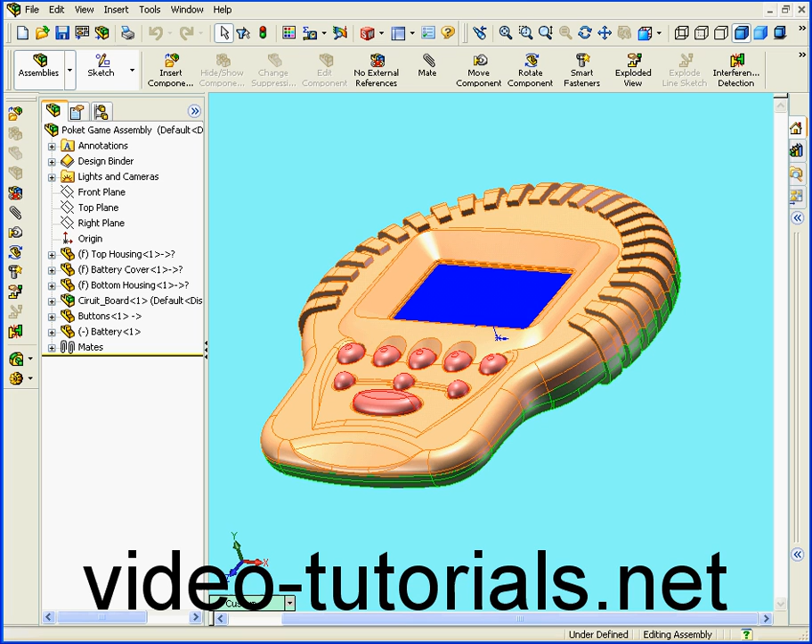Welcome to the final segment of our Pocket Game project. In this tutorial, we'll be finishing the LCD opening.

Let's right-click on the top housing and select Edit Part. Let's expand the specification tree.

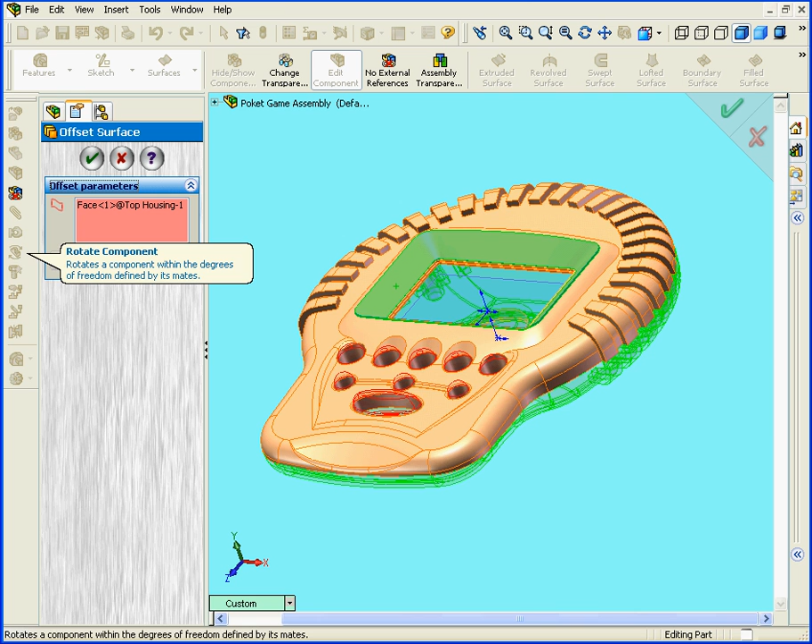Next, I'm going to offset this surface, by 0.5 millimeters. Tab. Let's reverse the direction also. Click OK.

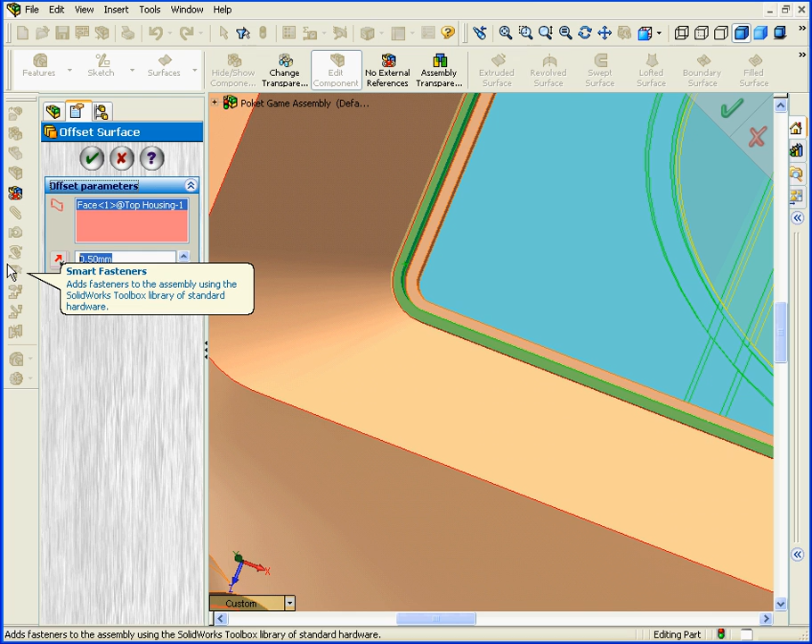Let's offset another surface now. Activate the Offset tool. There's something pre-selected here, let's delete it. Let's select the surface we want and enter a 0 offset distance value. Tab. And click OK.

Alright, let's hide our solid body. Expand the solid bodies folder, right-click and hide.

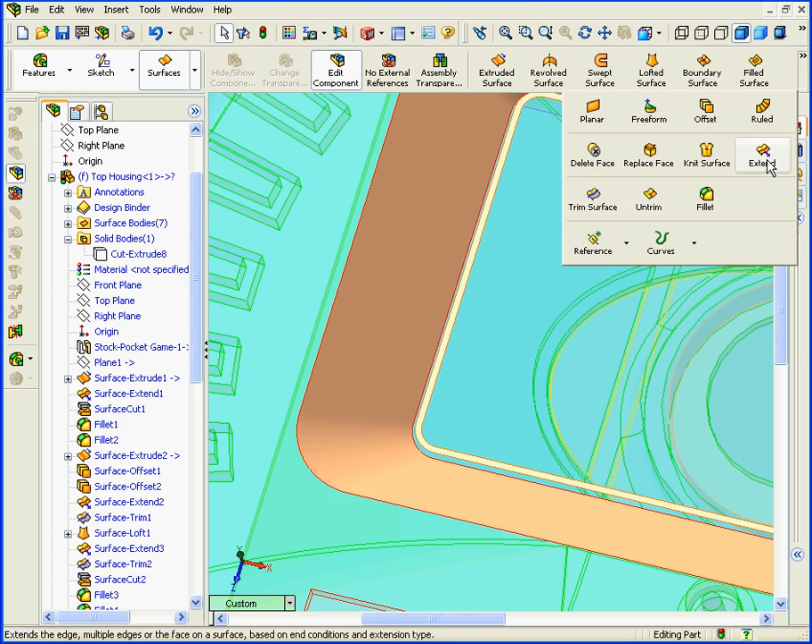Next, we'll need to extend this surface. Activate the Extend tool. Click on this edge. Under End Condition, choose Up to Surface. Now we select the surface to which we'll extend and click OK. Next, let's activate the Planar tool and create a planar surface right here.

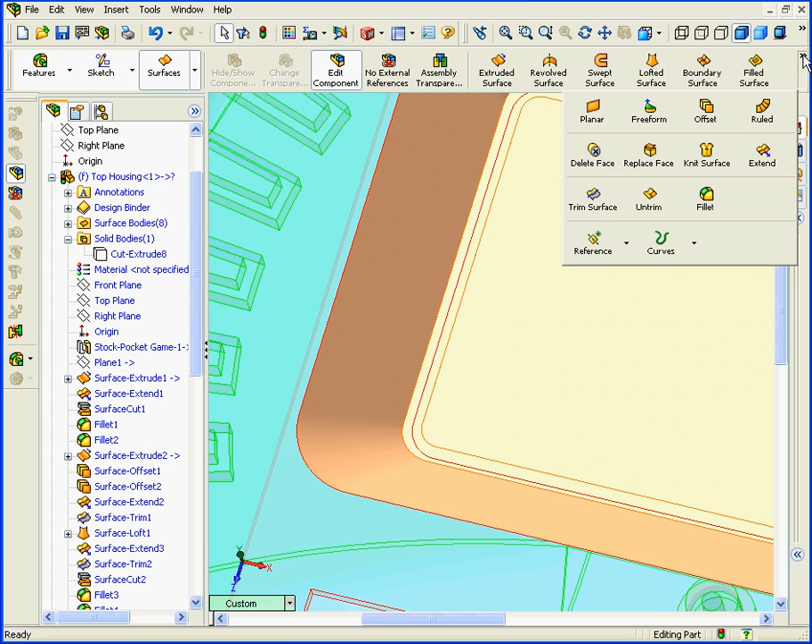Click OK. Now we'll activate the Knit Surface tool and we'll knit these two surfaces together.

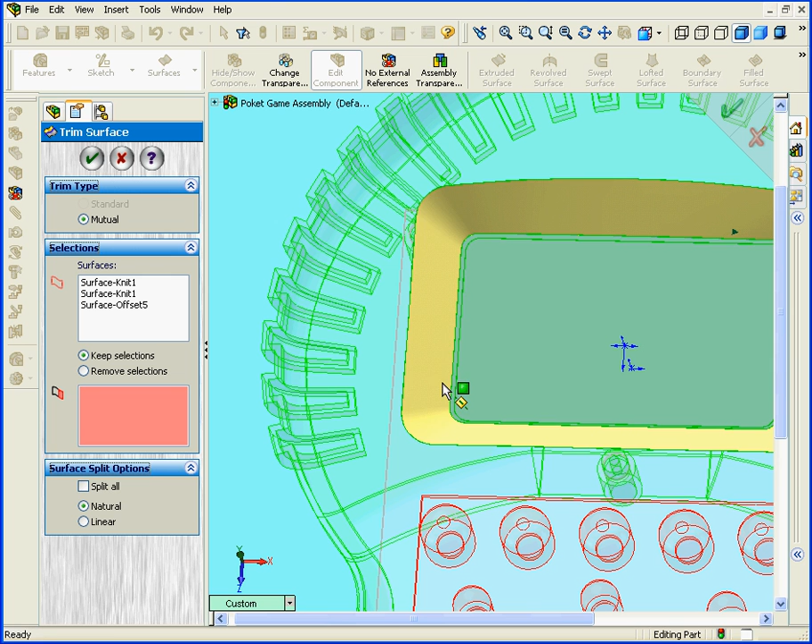Finally, I'm going to activate the Trim Surface tool. Let's select the Mutual Trim type. Let's select these surfaces. In the Keep Selection area, let's keep this surface and click OK.

OK, let's zoom out. Next, let's insert a plane that's parallel to the top plane. Select Top. We're going to offset the plane by 12 millimeters. Let's check to make sure it goes in the right direction and click OK.

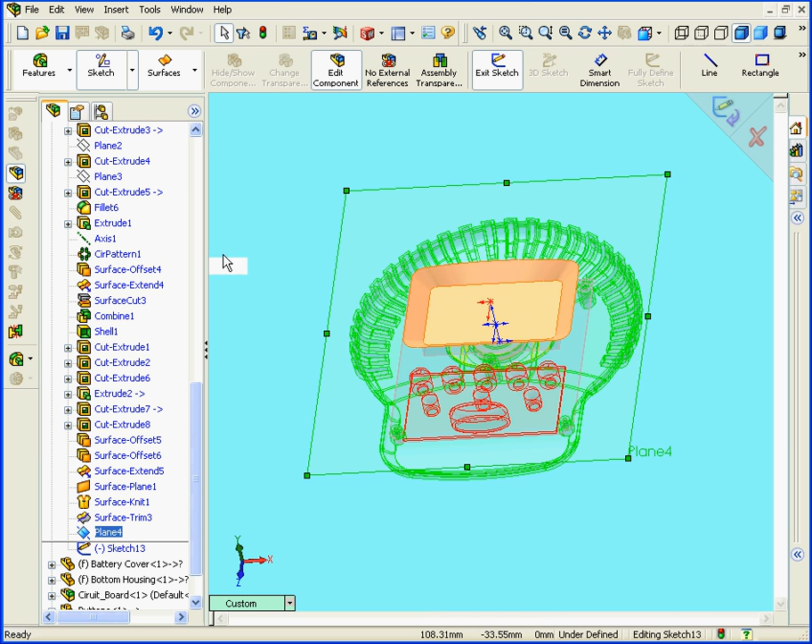Now let's right-click on our new plane and insert a sketch. We'll take a top view.

Next, let's activate the Rectangle tool. Right-click and select.

Activate the Point tool. We'll insert points here, here, here.

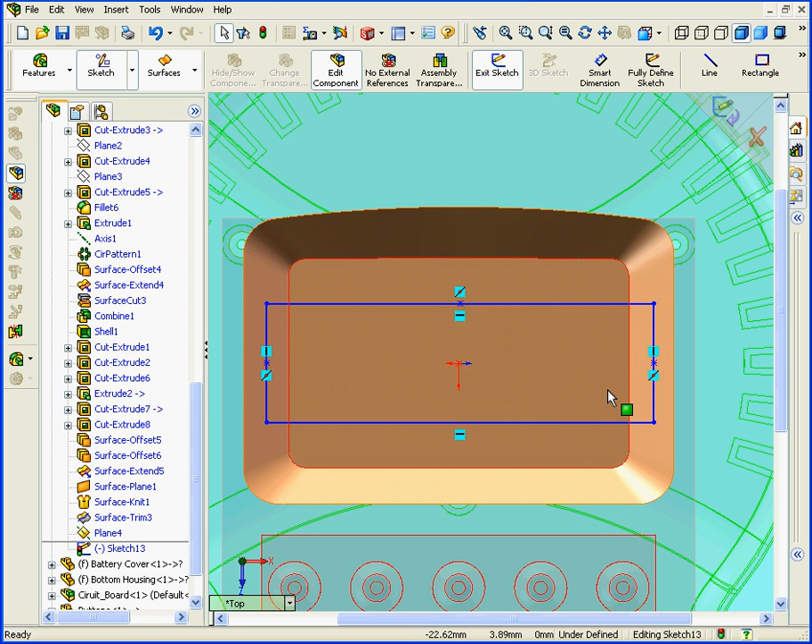Now Shift-select this point, and add a vertical relationship. Shift-select this point, and add a horizontal relationship. Oops, I pressed vertical by mistake.

We'll need to delete that, and let's add a horizontal relationship. And click OK.

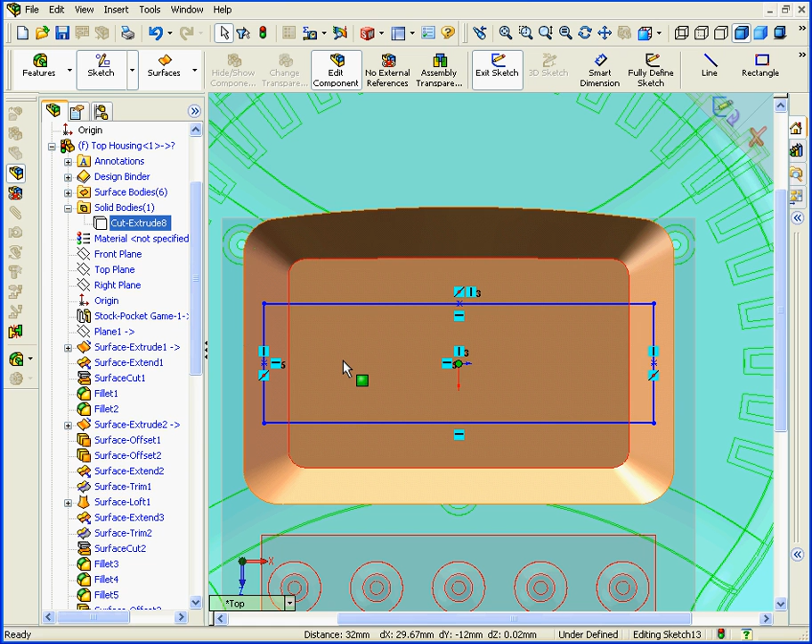Now we'll activate the Line tool to connect these 2 points. Right-click, select.

Let's Smart Dimension. 60 millimeters here. OK.

Here, let's enter a value of 16 millimeters. OK. And OK.

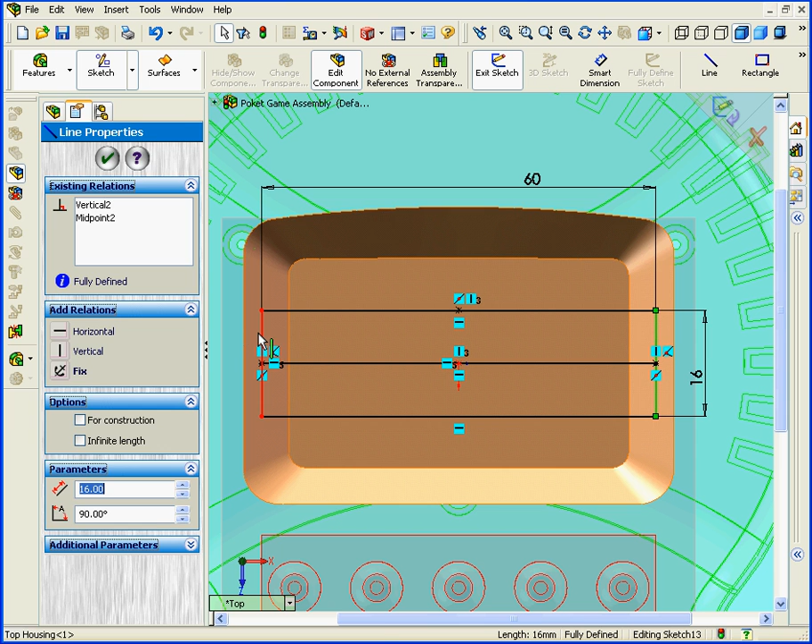Now let's Shift-select these 2 lines and convert them to construction geometry. Next, I'll Shift-select these 3 lines and activate Offset Entities.

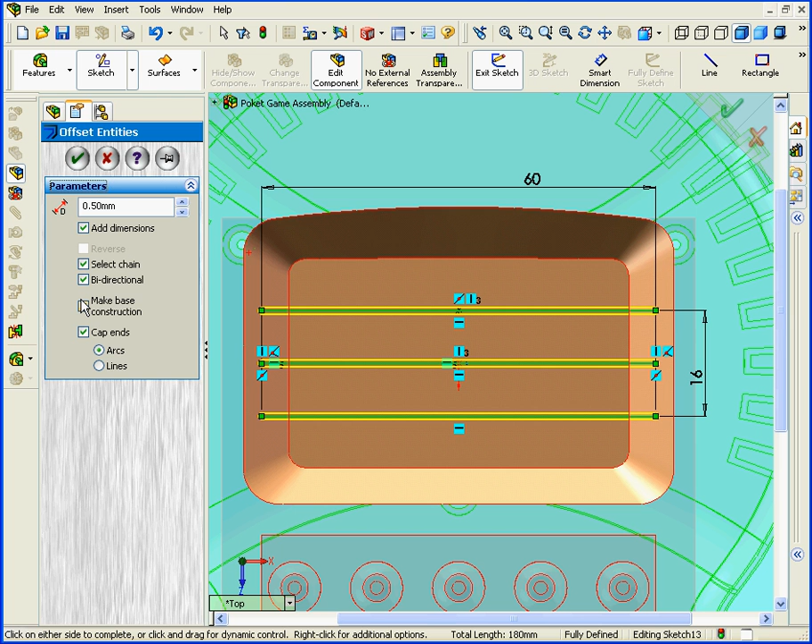Now let's bring back our solid bodies. Right-click and Show.

Next, we'll make an extruded cut. Let's activate the Extruded Cut tool. From the End Condition drop-down menu, let's choose Up to Surface.

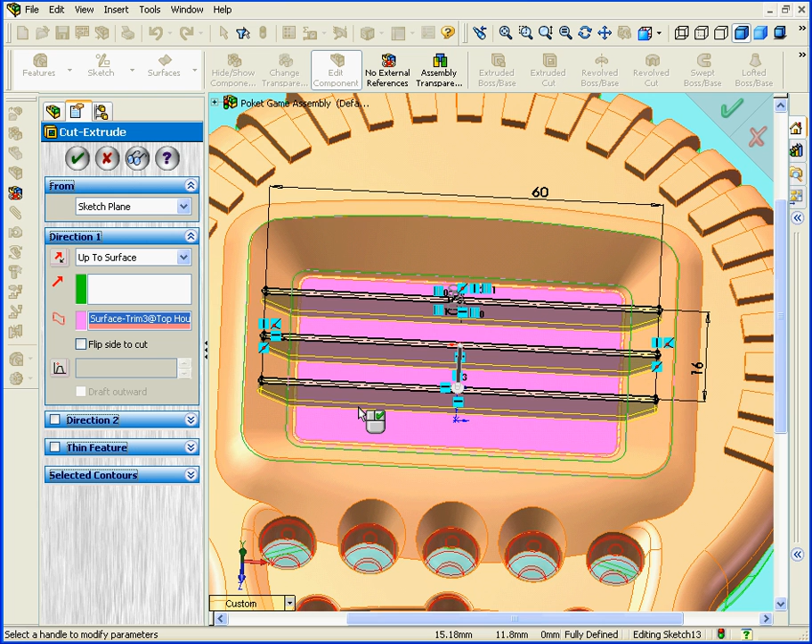And in our surface selection area, we'll select this surface. Click OK. Let's hide this surface. Right-click and hide.

Okay, let's rebuild our assembly. And let's hide this plane. Right-click and hide.

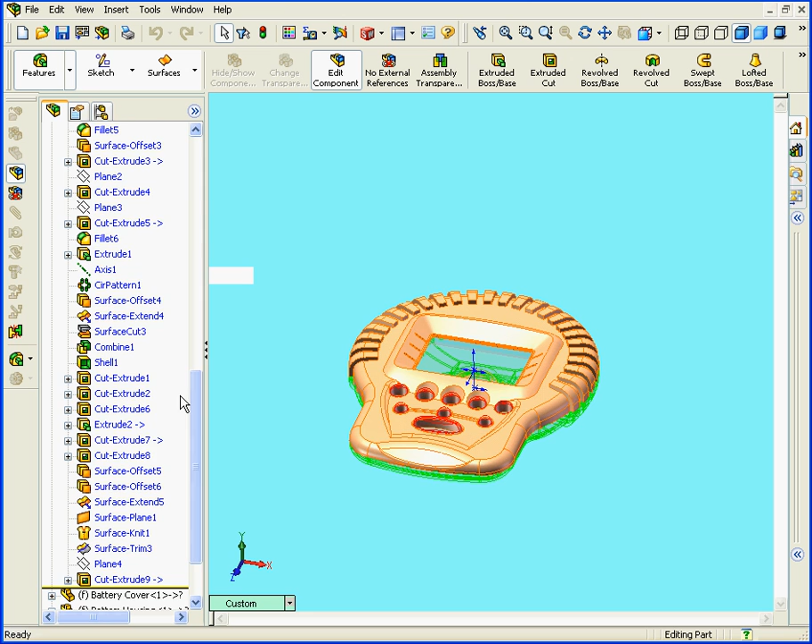Let's edit the assembly. Right-click, Edit Assembly. Okay, it looks good. And this completes our Pocket Game project. We hope you've enjoyed this practical application of SolidWorks to a real-life project.